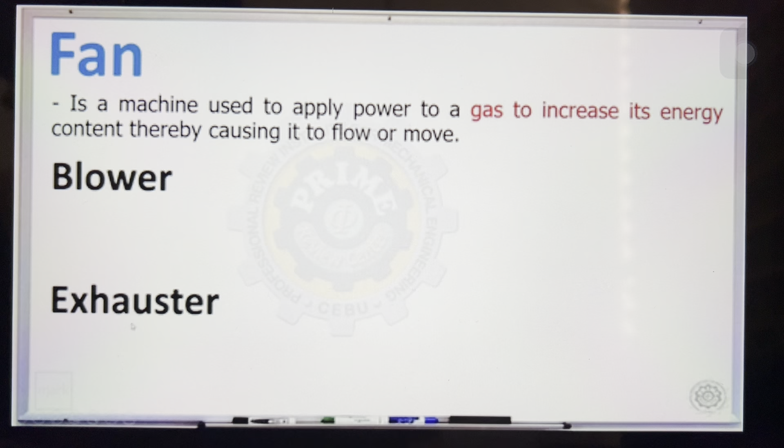Okay, we also have blowers and exhauster. So kung sakaling lalabas sa board exam na terminology, ito yung main difference nila. Blower is a fan used to force air under pressure. That is, the resistance to gas flow is imposed primarily upon the discharge. While the exhauster, it is a fan used to withdraw air under suction. That is, the resistance to gas flow is imposed primarily upon the inlet.

So pag sabing blower, pina-force mo yung air under pressure upon the discharge. Pag sabi mong exhauster, you withdraw air under suction. Okay? Yung ating resistance to gas flow is imposed primarily upon the inlet. So parehas silang fan, magkaiba lang sila ng purpose. Pero anyway, we have the same formula. Okay, so elaborate natin yung mga yan.

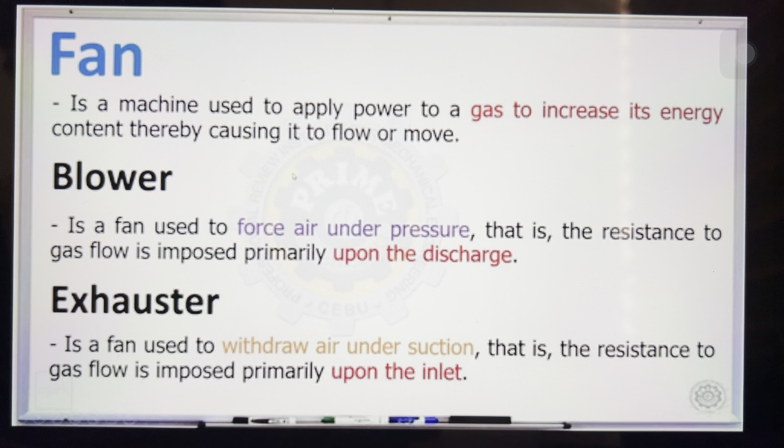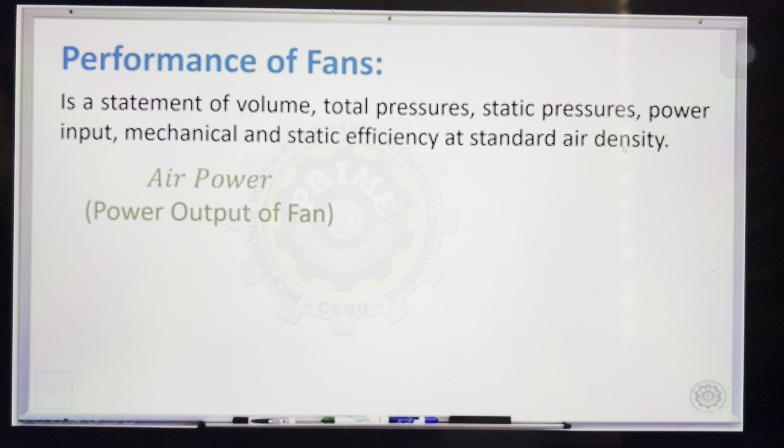Okay, pag sabing performance of fans, it is a statement of volume, total pressures, static pressures, power input, mechanical and static efficiency, at standard air density. So meron tayong mga basic formula. We have the air power or the power output of the fan, and you have the brake power or the power input of the fan.

Okay, so pag sabing air power, ito yung theoretical power ng fan. Ang formula natin dyan, gamma QH. So parehas nung sa pumps. Kaya lang, since fan yung pinag-uusapan natin, let's be specific. So this is gamma QH. Since this is air power, lahat ng data na yan under air. So gamma ng air, volume flow rate ng air, tapos total head of the air.

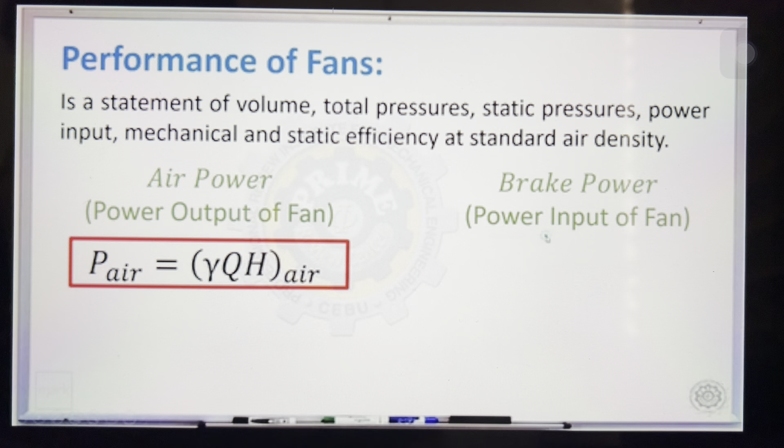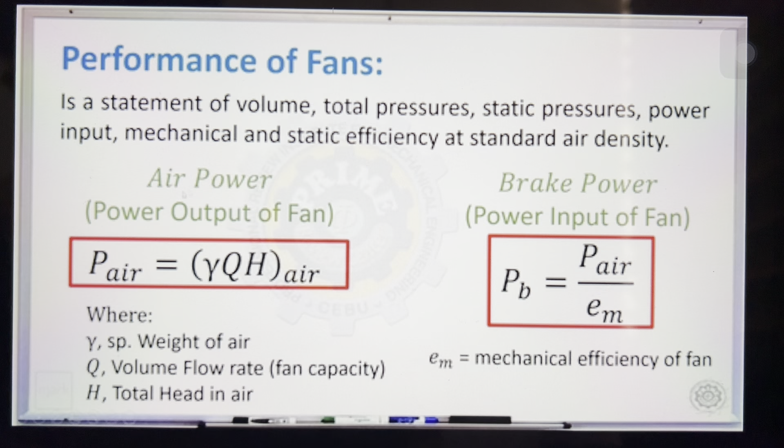Kapag brake power naman, dito papasok yung efficiency. So mas malaki yung brake power kaysa sa theoretical power. So i-divide natin yung efficiency ng ating fan or the mechanical efficiency. So this is gamma, specific weight of the air. Q is the volume flow rate or the fan capacity. And then yung capital H, that should be the total head in air. This is the brake power, and then yung EM is the mechanical efficiency ng fan. So yan yung mga general formula para makuha yung air power and brake power. Next.

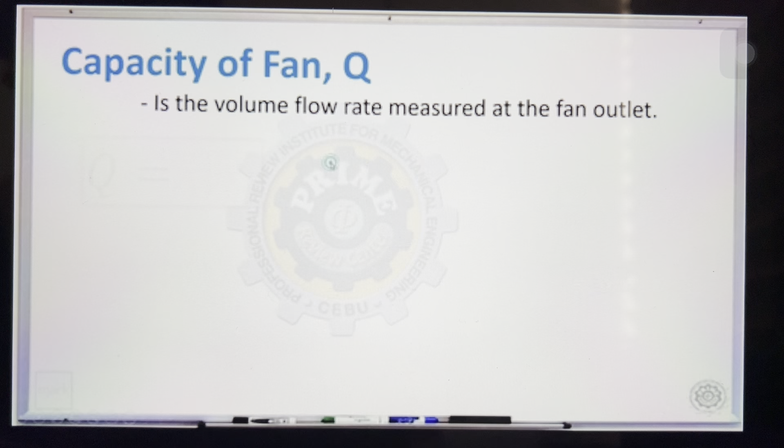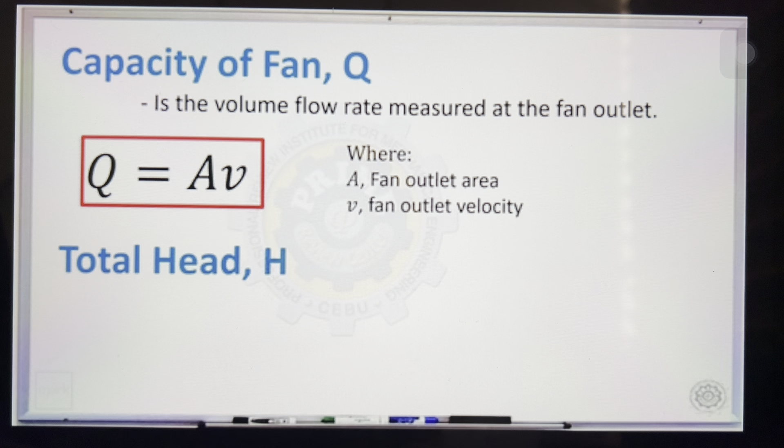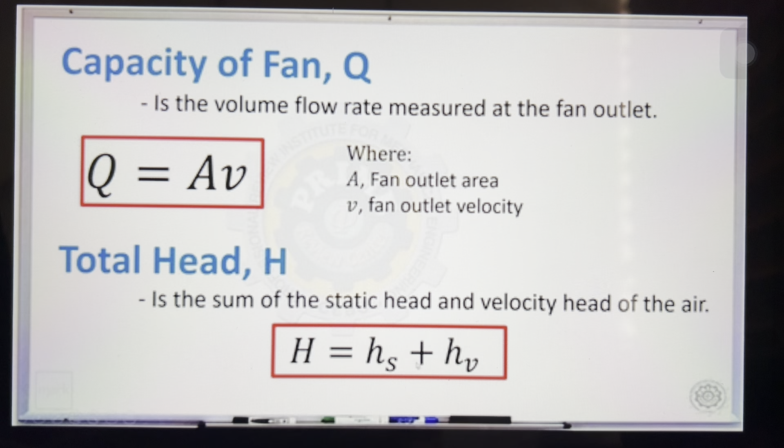Para makuha yung capacity ng fan or the volume flow rate, basic formula yung gagamitin. So para makakuha ng Q, area multiplied sa velocity. So most of the time, ang ibibigay sa atin is the fan outlet area. So since this is outlet, ang gagamitin mong velocity should be the fan outlet velocity. Para naman makuha yung total head ng ating fan, combination lang yan ng static head tsaka velocity head. So you have the static head plus the velocity head.

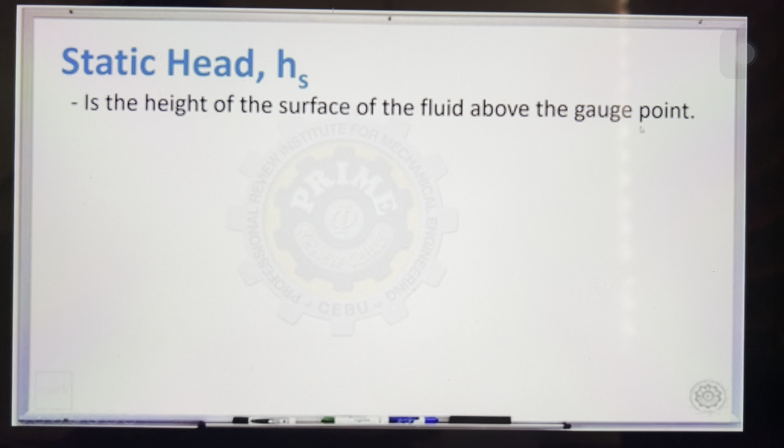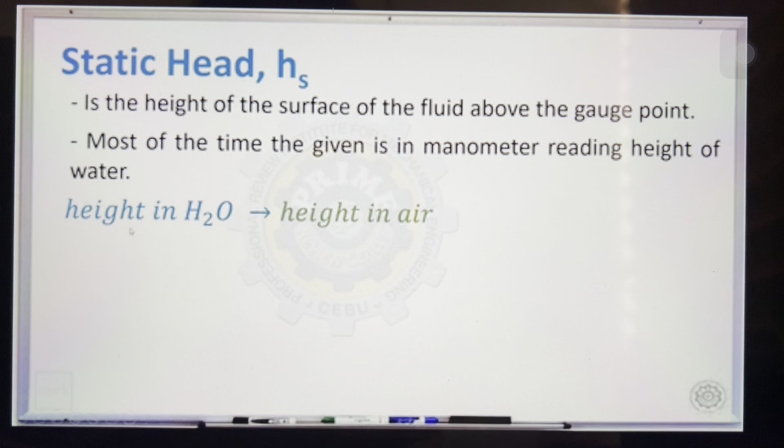Next. The static head hs is the height of the surface of the fluid above the gauge point. Typically, it is already given, kaya lang in manometer reading in terms of height ng water. So since ang ibibigay sa atin height in water, ang kailangan mo, height in air. Para ma-convert natin, gamit lang tayo ng formula sa pressure. Ang pressure ng water should be equivalent dun sa pressure ng air. Ang formula ng pressure gamit yung height is gamma H.

So ang pressure ng water, gamma ng water times height in water. Ang pressure ng air, gamma ng air times height ng air. Yung height ng air dito, ito yung kailangan nating static head. So para makuha yung static head, pwede mong ibaba yung gamma ng air dito. By the way, yung gamma pwede palitan ng density. So rho GH, rho GH. Parehas silang may gravity, so you can cancel out gravity.